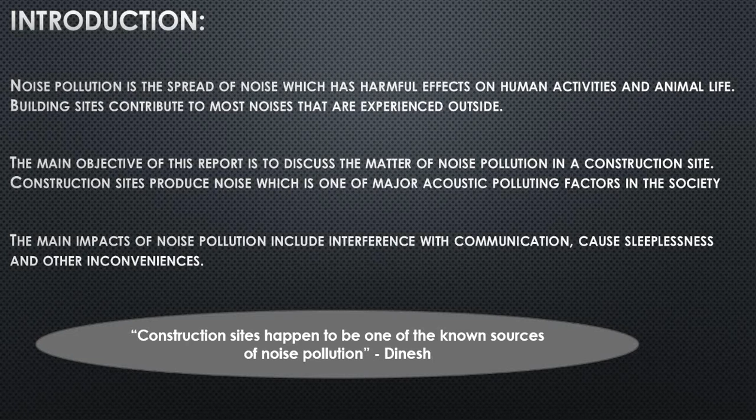The main impacts of noise pollution include interference with communication, sleeplessness, and other inconveniences. The fact about noise pollution is that construction sites happen to be one of the known sources of noise pollution, by Dinesh. Construction site.

Construction activities and demolition of buildings usually take place in residential places which are usually found outside of towns. Construction noise comes from activities such as demolishing, strategic work, and building renewal work. In urban areas, most construction noise comes from the construction of buildings, highways, and city streets. Contributors of construction noise include loaders, pneumatic equipment, trucks, machine-mounted percussion drills, breaking equipment, and air compressors.

Construction sector is a significant contributor of pollution, attributed to release of exhaust particles and a lot of noise, mostly from machinery and heavy equipment used in the field of construction.

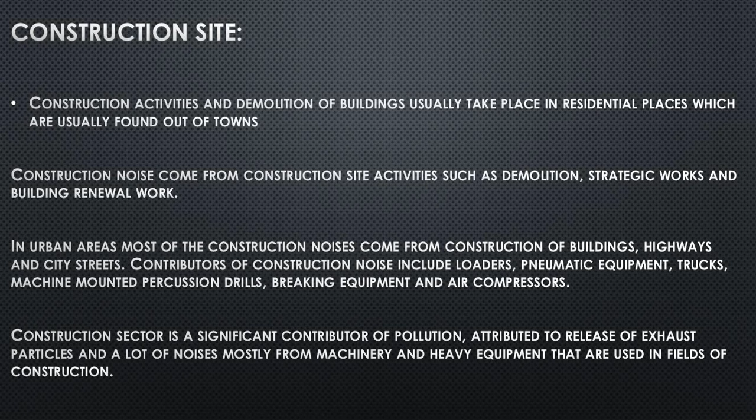Coming to the factors of noise pollution, the noise from the construction workplace comes from different sources. They produce varying types of noise such as blast noise, background noise, rotating noise, idling noise, impact noise, squeals, intermittent noise, and howling noise.

Each equipment varies in decibel level, such as the pile driver, air arcing gouging, impact wrench, bulldozer, air grinder, and crane. These equipment decibels vary from 100 to 112, as we can see in this diagram.

A few other equipment such as jackhammer, quick cut saw, compactor, crane, grinder, and welding vary from 90 to 100 decibels.

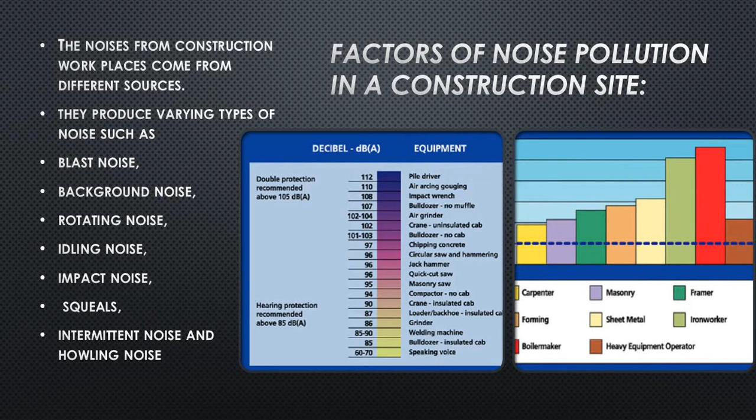Too much noise pollution is a source of confusion and irritation. In human beings, it can end up causing hypertension, loss of hearing, and irregular heartbeat.

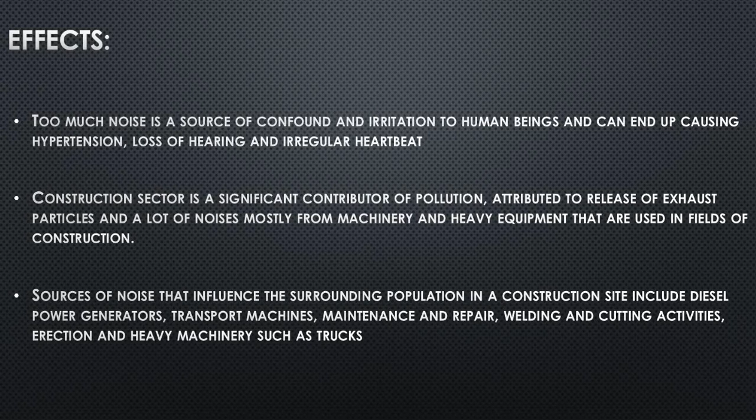Construction is a sector that is a significant contributor of pollution, attributed to release of exhaust particles and a lot of noise mostly from machinery and heavy equipment used in the fields of construction. Sources of noise pollution that influence the surrounding population in a construction site include diesel power generators, transport machines, maintenance and repair, welding, cutting activities, erection, and heavy machines such as trucks.

Problems faced: each of these activities and the use of different machines occur at different times, hence the noise created also varies with time. These jobs usually overlap, therefore workers and surrounding residents who are relatively quiet get exposed to the unfavorable noise from the construction.

This is always experienced more in urban areas than in rural areas. Some investigations assume that there is always no noise pollution in rural areas. Heavy trucks carrying building materials are always very loud compared to normal passenger vehicles.

The noise from these trucks is always irritating to pedestrians and to those who live around the construction sites. Too much noise from these trucks causes health problems such as unusual heartbeat, frequency changes in hormone states, increased rates of blood pressure, and sleeplessness.

Ways of managing and controlling noise pollution: every construction project or activity is always different from the other and they usually keep changing. Construction activities do not happen in one location, rather they are not stationary. These activities occur in places where they can be affected by topography, landscaping, weather, atmosphere, and wind tunnels.

The methods usually include use of quieter equipment, barrier protection, noise perimeter zones, modification of existing equipment, periodic maintenance of machines, and proper scheduling of activities at the construction sites.

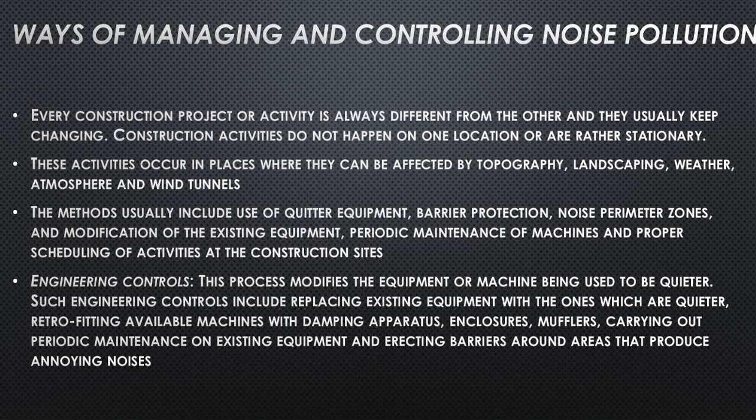Engineering controls: this process modifies the equipment or machine being used to be quieter. Such engineering controls include replacing existing equipment with quieter ones, retrofitting available machines with damping apparatus, enclosures, mufflers, carrying out periodic maintenance on existing equipment, and erecting barriers around areas that produce annoying noises.

Now we're going to see about prevention of noise pollution. Coming to administrative controls, these include management decisions on workload, work responsibilities, and work rotation to minimize workers' exposure to too much levels of annoying noise.

Coming to engineering controls, these include replacing existing equipment with quieter ones, retrofitting available machines with damping apparatus, enclosures, mufflers, carrying out periodic maintenance on existing equipment, and erecting barriers around areas that produce annoying noises.

Now coming to personal protective equipment, this includes earplugs, which are always provided to workers to minimize their exposure to dangerous noise effects. This also serves as the last option when other control methods have been tried and observed to fail or are infeasible.

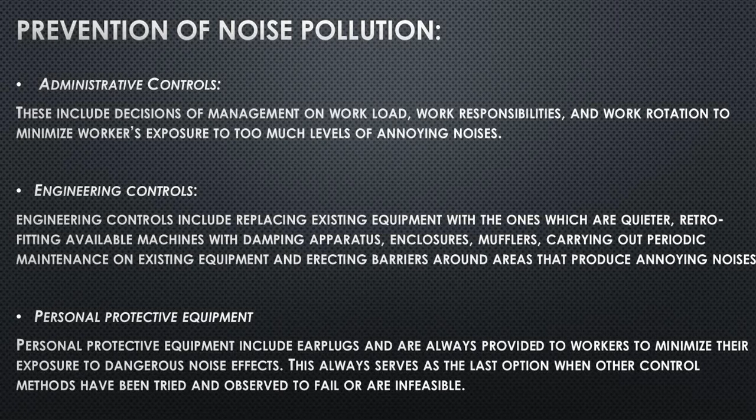Coming to the conclusion, construction activities seem very noisy and are also very dangerous, affecting the workers and the comfort of the people residing around the construction site.

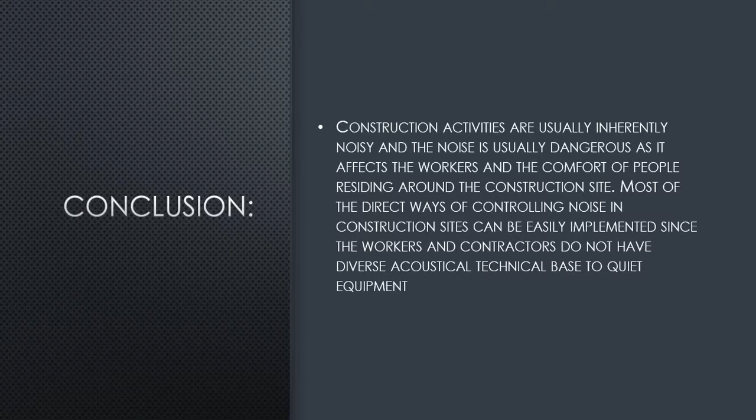Most of the direct ways of controlling noise in construction sites cannot be easily implemented since the workers and contractors do not have the acoustical technical base to quiet equipment. Thank you for giving this opportunity.